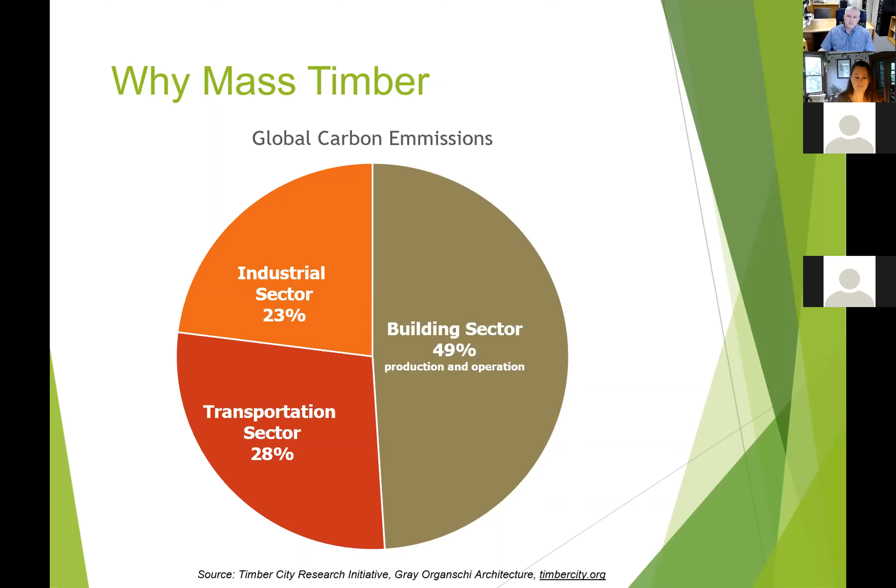So this next slide, and I apologize for the graphic, you may not be able to read it, but I wanted to share this as a way of talking about the carbon advantages of mass timber over the alternative materials, specifically concrete and steel. If you get a chance to take a closer look at it, that would be fine, and we can certainly share this presentation with you later. But what I've done is summarized the information that's in the graphic underneath the graphic.

And the net outcome of this is that a metric ton of concrete requires about a metric ton of carbon to produce. Steel is a much dirtier production process, and there is no carbon sequestration benefit to steel. So essentially, for every metric ton of steel used in construction, you're looking at 2.22 to almost 3 metric tons of carbon emission in the production process.

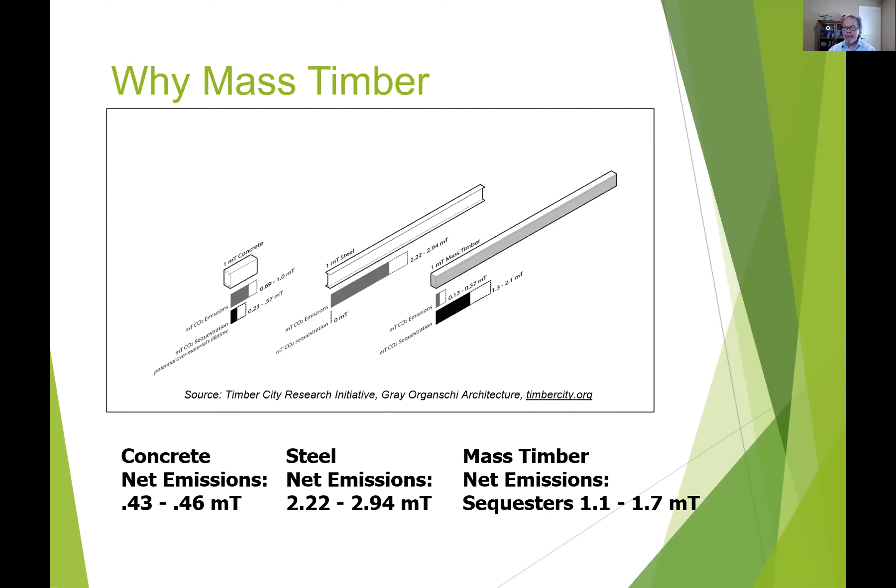Mass timber, at the end of the day, actually sequesters more carbon than is required to produce it. A metric ton of mass timber produces less than half a metric ton of carbon in the process of producing it, but it also sequesters up to 2 metric tons of carbon in the finished product. So at the end of the day, building with mass timber actually extracts carbon from the atmosphere. That is an absolutely huge game changer in the world of climate change, as you can imagine.

So just to quickly summarize what I believe are the benefits of increasing the use of mass timber over the alternative materials: one is that, at the end of the day, we can improve forest health. And that's always been a focus of Forest Business Network.

It's one of the reasons that I am so actively working with Forest Business Network, because I am passionately committed to improving forest health. Part of the outcome of improving forest health is a reduction of fire danger.

Mass timber can use a lot of fiber out of the forest that doesn't have any commercial value elsewhere. We use small diameter timber, things like that, so we can reduce the fuel load and reduce the incidence of fire, and specifically catastrophic wildfire, which has been in the news in such a big way in the last 5 or 10 years or so.

Obviously, improved forest health also protects water resources. I know in the US, about 70% of clean water comes through the forest. Therefore, better forests mean protection of those clean water resources. It also means improved wildlife habitat, which is important to an awful lot of us.

Another benefit is by increasing the use of mass timber, we improve the rural economic activity. We put more people to work in those rural communities. And as we've already talked a little bit about, the reduction of carbon emissions in the building sector is a big bonus. Finally, the sequestration of carbon, taking some of that carbon out of the atmosphere, can have a huge benefit in the climate change equation. We have the ability as an industry to have an impact on climate change moving forward by substituting mass timber for concrete and steel in the construction process.

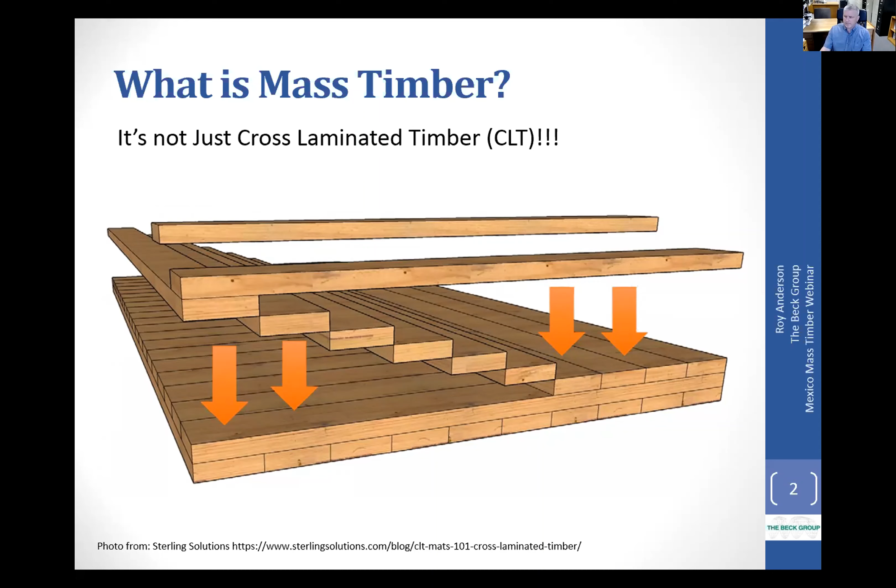This one is dowel laminated timber, or DLT. You can see the boards are oriented vertically just like NLT, but instead of nails being used to hold the pieces together, these are wooden dowels. The lumber that makes up the panel is usually about 12 to 15% moisture. These dowels are made out of hardwood, dried down to about 7% moisture. So when they're placed into the panel, they're drier than the surrounding wood, and they pick up moisture and swell, forming a really tight fit. The whole thing is held together with no adhesives, just the dowels and wood's relationship to moisture holding it all together. I think that's a pretty cool thing about that.

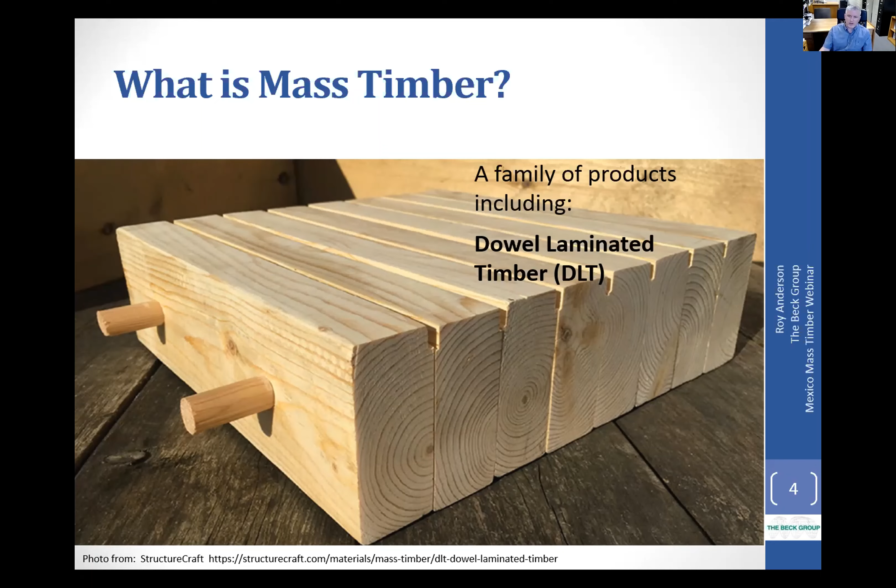Another type of mass timber is one that's been around for a long time, glue laminated timber, and that's what you see in these pictures. This one right here, I believe the dimensions are 24 inches by 24 inches. I believe those particular glulam timbers were going to be used in a building in Milwaukee, Wisconsin, that's 25 stories tall, all wood, under construction right now. These pieces were going to be used in that building, just massive pieces of wood. The picture doesn't really do it justice when you're standing right next to it, it's pretty amazing how big a piece of timber that is.

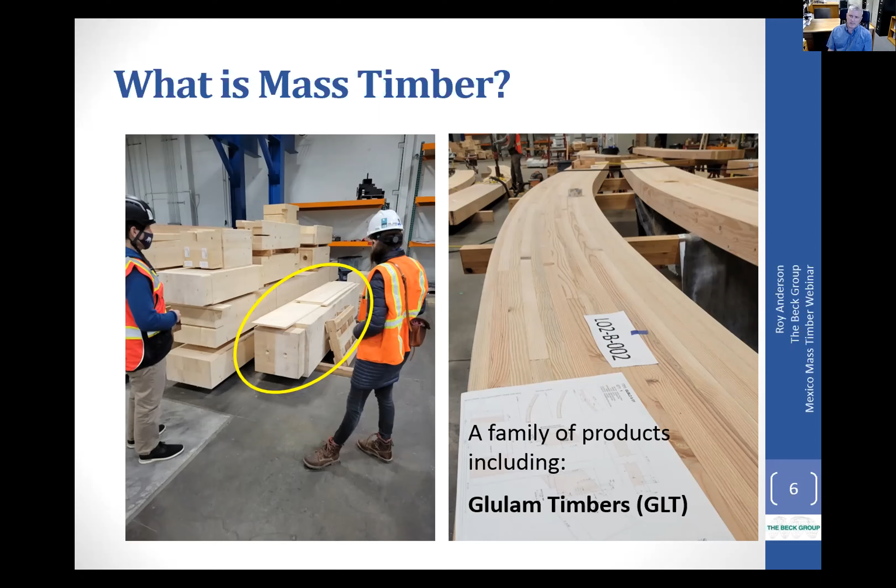So now I want to switch gears a little bit and talk about how mass timber is used. I believe this picture I have here is a mock-up, not a building that's actually been constructed, I believe, but I used it because it really shows all the different ways mass timber can be used in just one picture. You see the vertical pieces here, those are glulam timbers used as vertical supports in the building. The floors and ceilings are panels that could be CLT, mass plywood panels, could be DLT, could even be NLT, but that's typically used in a horizontal application as a floor or ceiling. In some buildings, the walls may even be made out of CLT, but that's not shown here.

I believe these would be very large GLT pieces, but they might also be just massive panels as well. But the point is, there's a variety of different ways that mass timber is used in buildings. And I think Lek and Emily are going to talk more about that.

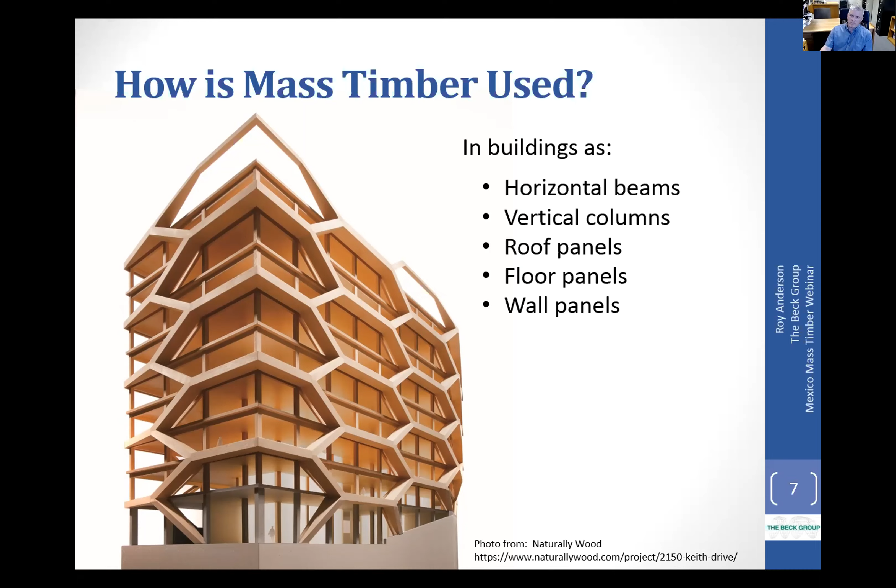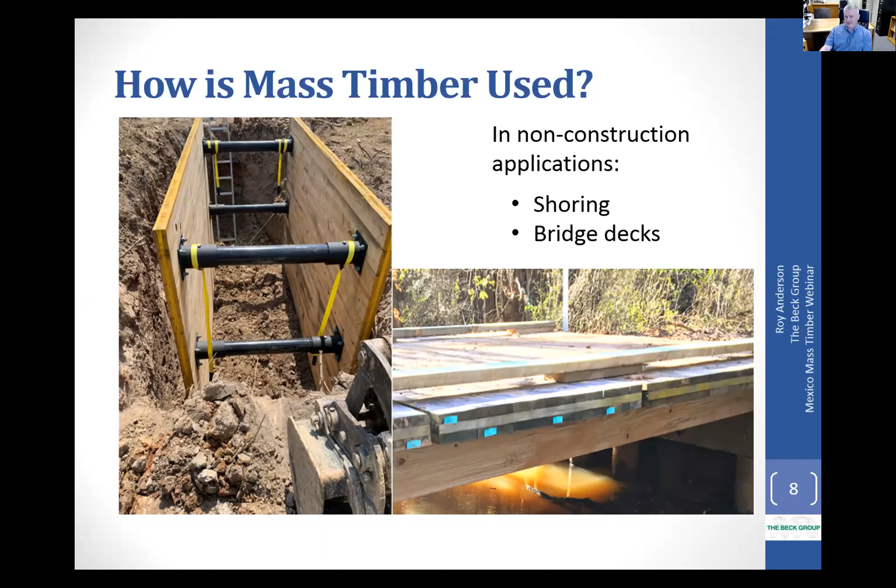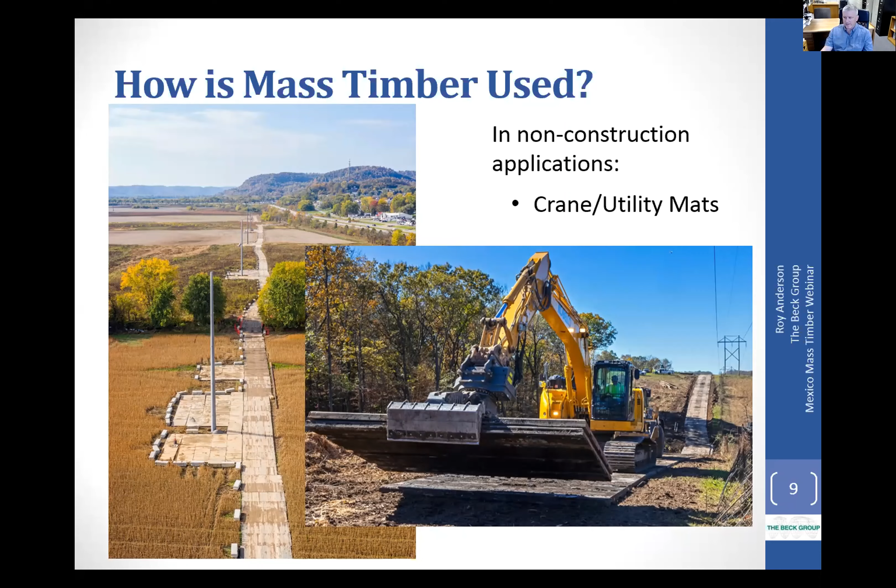So those are a lot of the ways that mass timber is used. I'm going to shift gears again now and get into some information that's contained in the report that David mentioned, which is available to all of you. I've been working on that report for 3 years, and it keeps evolving, with new information being added. I think it's a great resource, so I encourage you to download it and take a look at it.

Those things then go on to the mass timber manufacturers who make the different kinds of mass timber I just talked about. Then there are architects, designers and engineers who specify how it's going to be used in a building. Construction companies come along and build it, and finally people are living and working in mass timber buildings.

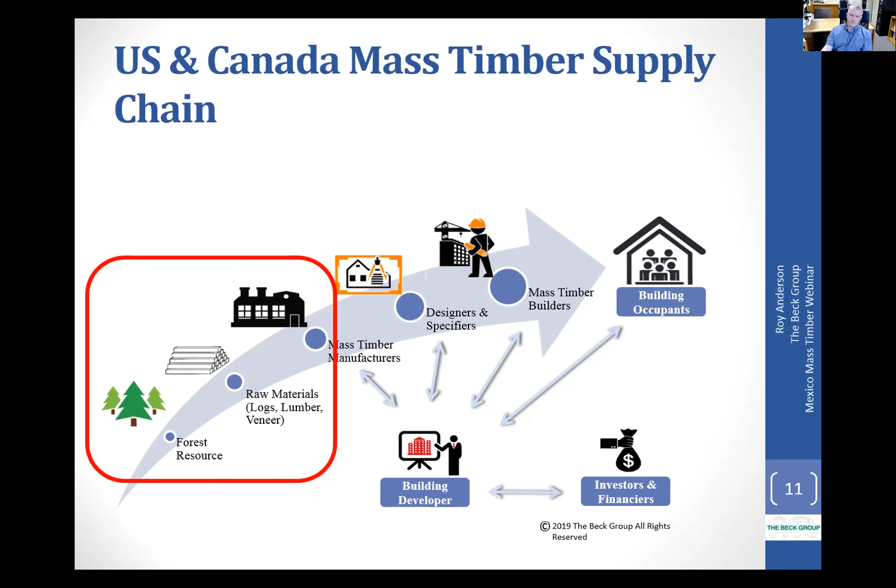I always reference this back as a way to help organize my thoughts when thinking about mass timber and how the whole industry functions. In the next few slides, I'm going to talk about these particular sectors: the forest resource, some of the raw materials that go into making mass timber, and the state of the mass timber manufacturers operating in North America right now.

Mexico has 160 million acres. So if you add it all up, it's about 1.8 billion acres of forest in North America. I don't know the details about Mexico, but it's roughly a third of the land area that's forested. And that hasn't really changed for well over 100 years - the amount of land we have as forest has been really stable for a long time. I find that's good news, and encouraging to a lot of people, because you hear so much about destruction of forests and things like that. But at least for North America, that has been stable for a long time.

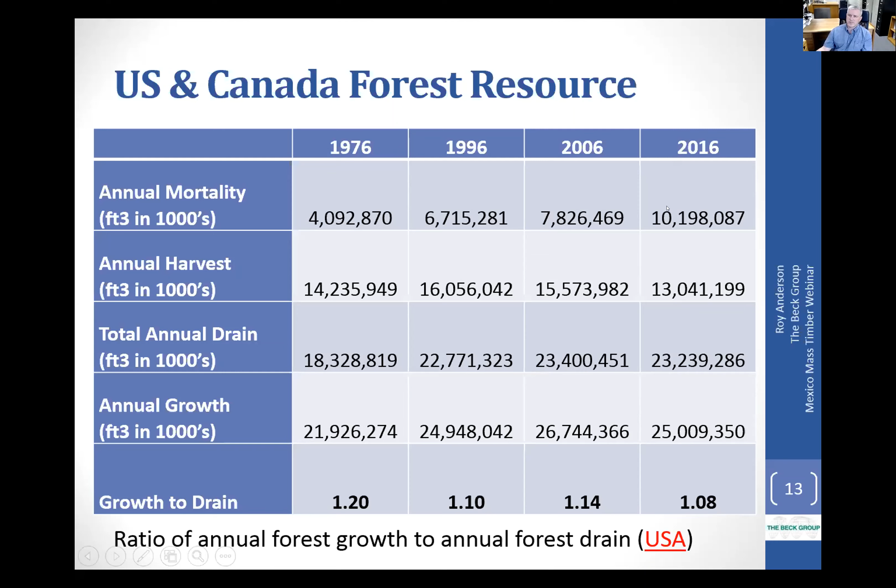One thing I'd point out here is the amount of harvest bounces around a little bit - 14 billion cubic feet in 1976, but here we are in 2016, and we actually harvested less timber in 2016 than we did in 1976. What's changing is that annual mortality is really on the increase, on the rise. I'd say that's mostly happening in Western forests in the United States, where we've had a lot of wildfire, drought, and large outbreaks of insects and disease that have affected thousands and millions of acres of forest. So the reason you see this ratio dropping isn't because we're harvesting more trees, it's more that trees are just dying naturally for a variety of different reasons.

They're actually adding more fiber each year than we are in the United States. But I would say one exception to that is in Western Canada, especially British Columbia, where they had a very large outbreak of beetle attack that killed a lot of trees, and they had to salvage as much as they could. They went into mass salvage mode, and that means now they have to pause harvesting more trees in that region to give the forest time to catch back up.

So that's just some highlights about the forest resource, but I think the key pieces of information to take away are: one, the amount of forest has been stable for years in both the United States and Canada. There's more trees growing each year than are being removed either by harvesting or natural mortality.

And then, specifically in the Western US, there's a lot of standing timber volume that's just not available because of policy issues in the way publicly owned land is being managed. So I'm talking about national forests, the Bureau of Land Management, and in some cases state-owned lands. There could be even more trees harvested and we'd still be at sustainable levels, but some of the standing timber out there just isn't available because of administrative reasons.

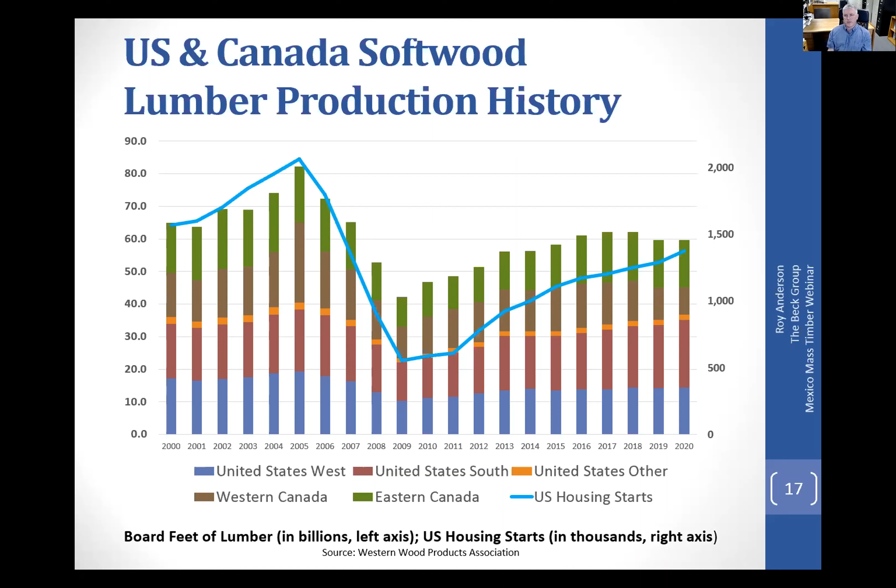But it's had a real negative impact on mass timber manufacturers, at least the ones in North America, because you didn't see the same run up in prices in Europe. That's slowly starting to happen more recently, but for a long time you didn't have that. So the mass timber manufacturers in Europe were able to get their lumber at a lower cost, and the US and Canadian mass timber manufacturers just couldn't compete with that. So you see a lot of mass timber being imported from Europe into North America over the last year and a half or two.

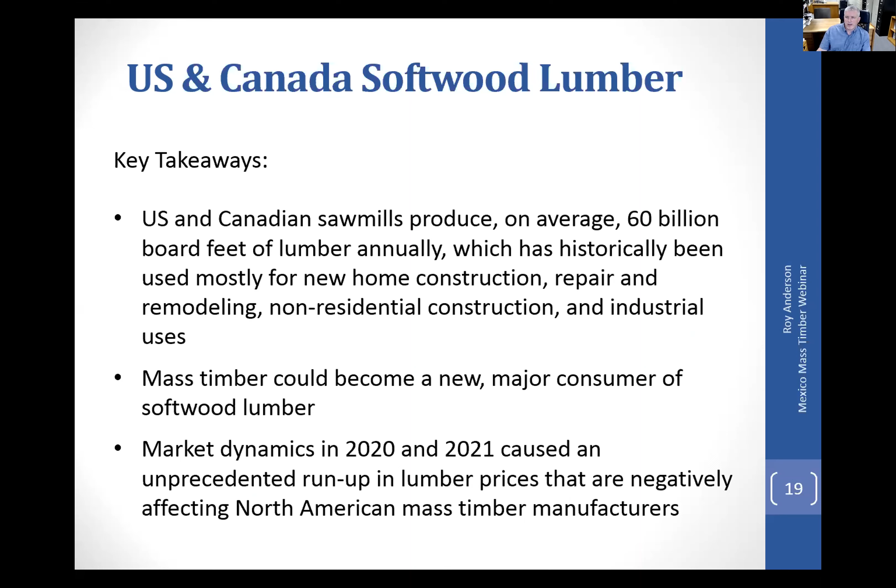That's because, like I mentioned, mass timber would be a major new consumer of softwood lumber, and I talked about the big run up in prices for lumber and how that's affected North American manufacturers. So now I've only got a couple slides left, I think three or four, but I'm going to switch gears again and talk about how mass timber is manufactured.

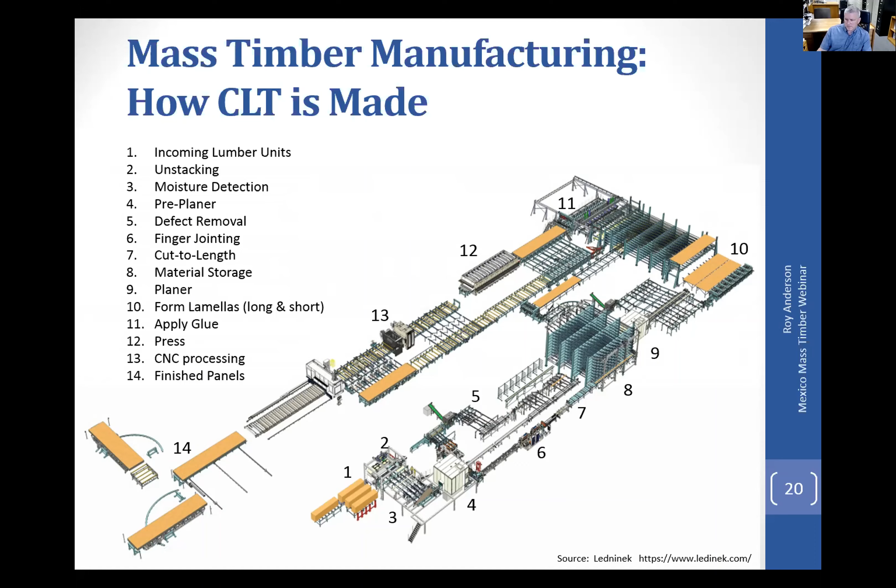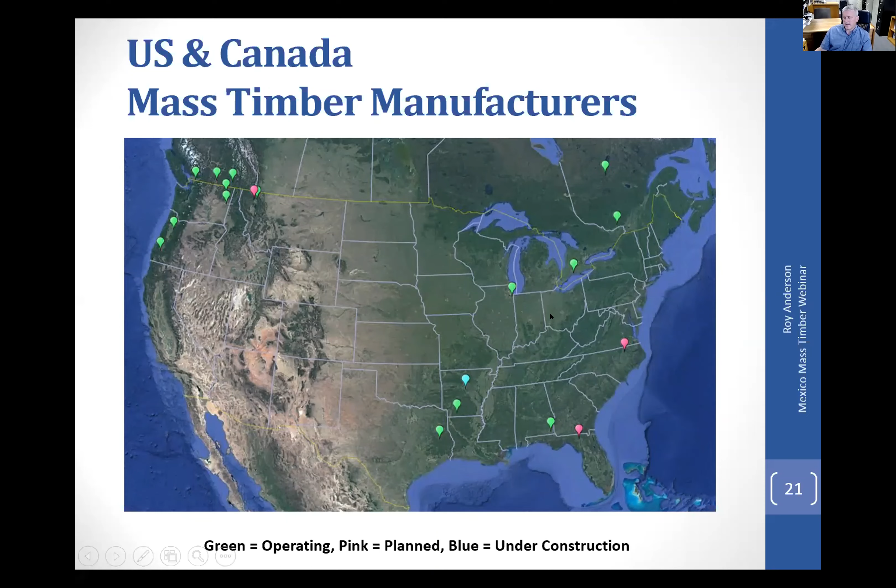If you're right in this region, you can access both types of lumber, so I think that's why you see a big cluster there. And down in the south especially, those plants, at least historically, have focused more on producing mass timber that's used in non-building applications, like matting to go along utility rights of way and things like that. So that's kind of the way things stand right now.

This one is a blue one. At the time I put this map together, this was a plant in Conway, Arkansas that was under construction, but they recently completed construction and are now starting operations.

These pink ones are plants that are under development. This one for sure is under development in Columbia Falls, Montana. And then these two I'm being kind of speculative, but Binderholz, a big company in Europe that makes mass timber, recently purchased two sawmills, one in Florida and one in North Carolina, that were in bankruptcy. Everybody thinks the reason they purchased those sawmills is because they're going to put mass timber plants adjacent to them. So it remains to be seen if mass timber plants will be built there, but I believe they will be. This lists all of the manufacturers and where they're located.

And as you can see down here at the bottom, their total capacity, and again this is based on throughput at the press, is estimated to be about 1.6 million cubic meters a year. And to give you a sense of what that means, a key metric is it takes about 22.5 board feet of lumber to make 1 cubic foot of mass timber.

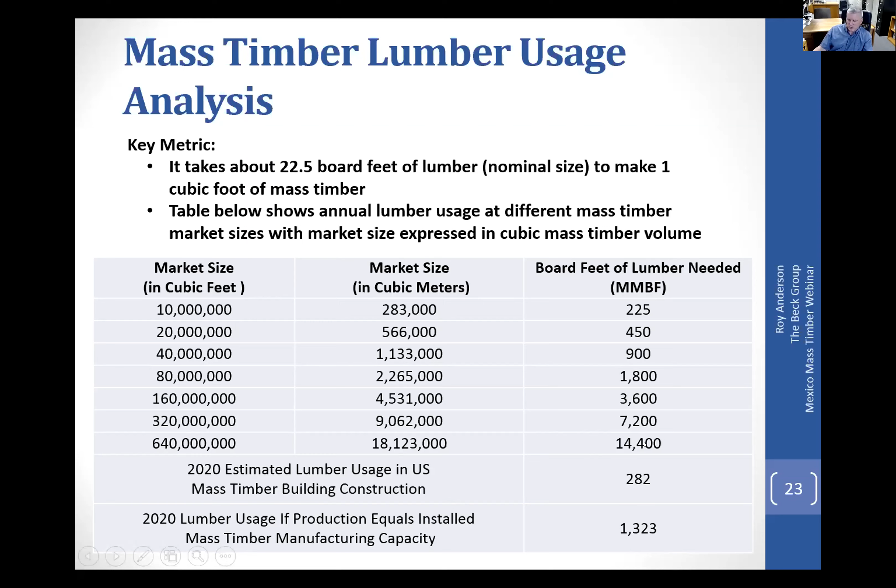But as far as I can tell, every year there's about 1 billion square feet of non-residential construction put into place in the United States. And this amount of mass timber would translate into about a little over 700 million square feet. So the point of that is, if this much mass timber was used, it would mean mass timber would be at about 70% market share.

And so I don't think—that's pretty optimistic that mass timber could take that much share of the non-residential construction market. So this amount, 14.4 billion board feet of lumber usage, to me is probably the maximum high end of what mass timber might consume as it goes forward.

So I may have gone longer than I was supposed to, but I think I'll stop right there and turn it over to Lek, and I'll stick around and answer questions if anybody has any.

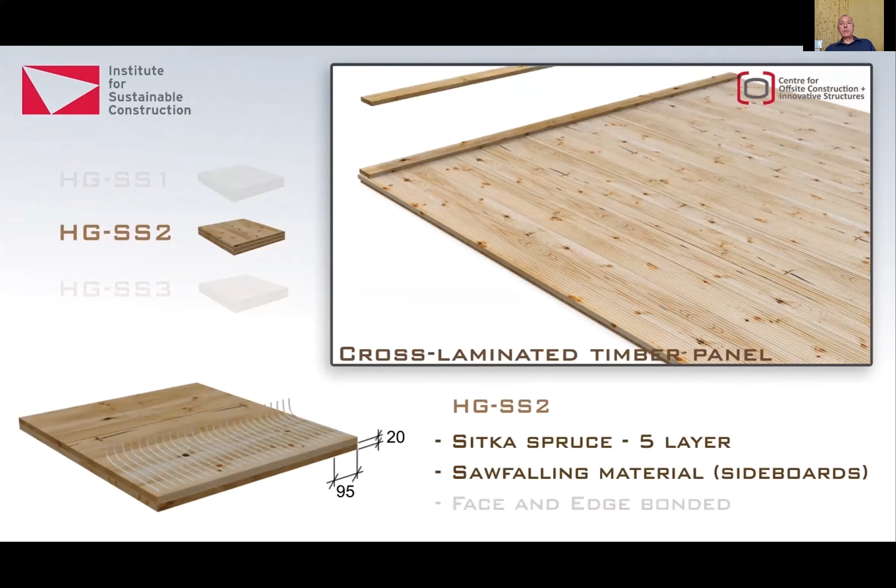At least 3 layers are required to call it a CLT. Otherwise, the product would not hold together very well. But in production there are 3, 5, 7, even 9 layers of panels, depending on the thickness needed.

Now these panels need to be prefabricated. Prefabrication means cutting out whatever necessary openings you need, ducts for utilities, as Roy mentioned. This is just one of the elements of a building. Combined together, they make the product, and the final product of the industry is actually not a panel, but a building, or the access mat that Roy mentioned.

So one consequence of this development is that what you receive is a panel of substantial size. In meters, this may be up to 4 by 20 meters in planar directions, and about 18 centimeters thick. So altogether, one panel like this may be 14 cubic meters of lumber. This is substantial cost per piece as well.

So quite often you may hear that the mass timber panel enabled prefabrication of houses. I think it's the other way around. Without prefabrication, it would not be possible to build with such massive panels. You see that prefabrication is needed because to put these panels together, you need ways of cutting, fabricating the edges, cutting the windows and door openings and ducts for utilities, which would not be possible with panels that large on the construction side.

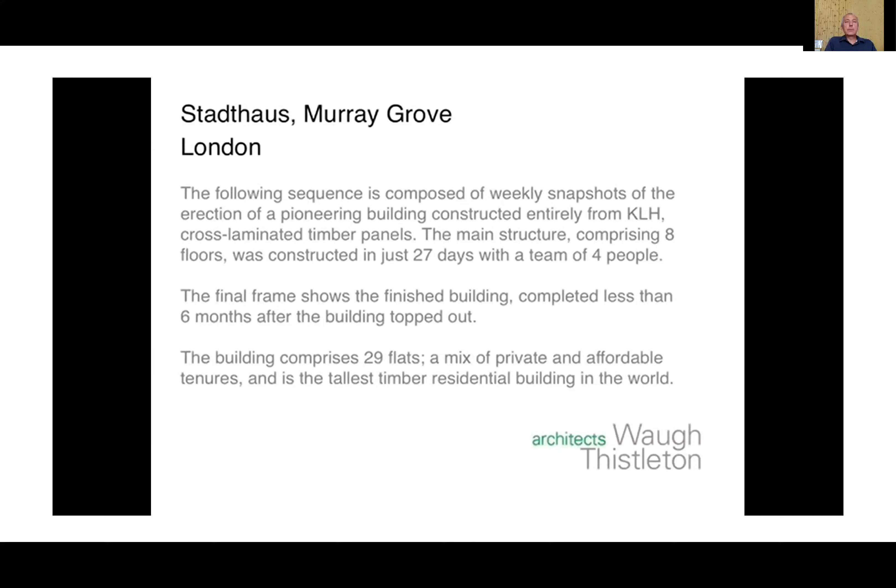The fabrication also allows building at a very rapid pace. This is one of the first tall CLT buildings, in Murray Grove in London, England. Since then, many other buildings have been built, but this one is peculiar because it's all panelized. Both walls and floors are CLT panels. They carry load and do not need any other superstructure. Here you can see its growth after the ground concrete layer has been put, and the construction goes at a pace of 1 week per story for a pretty complicated building.

Now, in other construction, like in Australia, there was a 7 or 8 story building that was completed at a pace of 4 days per story. That's pretty impressive, and this is one of the ways mass timber construction can potentially beat other construction technologies on cost. The world's largest timber building that I've checked so far, not necessarily the tallest, but by volume of mass timber panels used, is again in England, and it's called Dalston Lane.

Now, this panelized construction and prefabrication also allows shipping projects, not just panels, but entire projects, a long way from the place where they are manufactured. My best example is Australia, right here. There are a couple of companies in landlocked Austria that ship all projects fabricated, just ready to assemble, half the globe away, and it still pays the money.

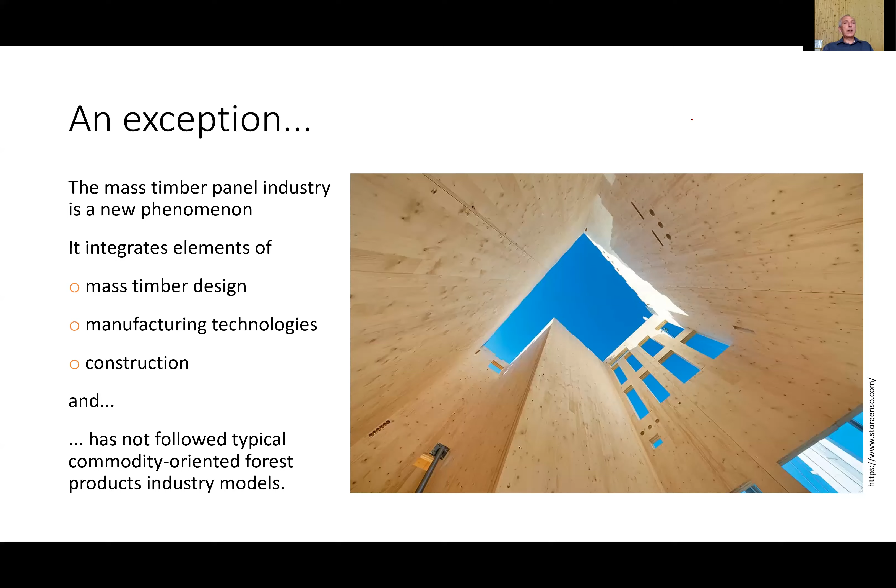So the industry did not follow typical commodity-oriented forest products industry models. I'm going to illustrate it some in here. If this would be a typical supply chain for commodity-oriented engineered products or structural products like plywood, glulam, and whatever, it all starts in harvesting, primary processing - this is what Roy was talking a lot about. You need to transport it. You have some industrial hardware, adhesives, and you produce your product. And then you don't care where it ends. You just put it for sale, and it magically disappears from the threshold of your factory.

Goes to Home Depot or to construction. So to illustrate it in a little different way, if construction is here and it's just one of the options, the manufacturer does not need to care where it goes and how it is being cut. This is all being done on site by people who fabricate the houses, right?

Now, it is very different with cross-laminated timber or with massive timber panels, where the product is essentially the entire building. So the supply chain has necessarily to involve the architect. Now, architects become like the gatekeeper to the production. They acquire projects - without them, nothing is being pressed in here. Engineers have to specify this. The CLT project management quite typically rests with the manufacturer, or if not, with a very specialized company, like this one represented by Emily, who does not produce CLT, but takes care of everything else in here, right?

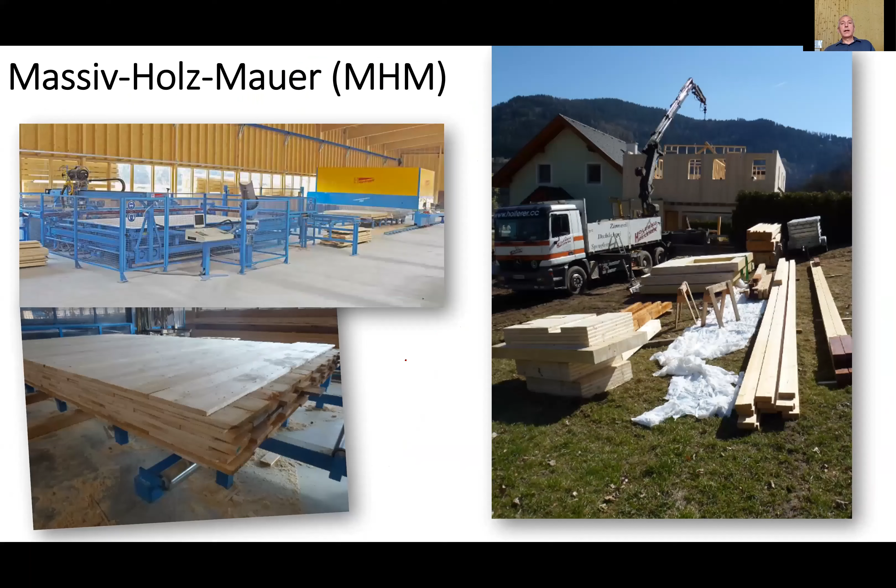Now, these statistics that I explained do not include other cross-laminated products that are not CLT. This is a nail-bonded cross-laminated timber. It's been developed in Germany, so the brand name is Massiv-Holz-Mauer, or MHM for short.

It is made in 3 simple, somewhat automated steps. First, planing the boards. Then there is a robot that lays them up and adds aluminum fluted nails to this. This penetrates just 2 layers at a time. The aluminum nails are here because then the CNC center may cut through this panel without losing teeth on steel nails. These are being used for small construction, mainly for walls and ceilings.

This product is not good for floors. Now in Switzerland, a new technology has been developed. You've heard Roy mentioning dowel laminated lumber.

This is cross-laminated lumber that is bonded with hardwood dowels. They can produce panels that are almost as strong as those made with CLT, where you bond them with adhesive. They are being produced on specialized, highly automated lines. About 8 lines like this are operating in Europe right now.

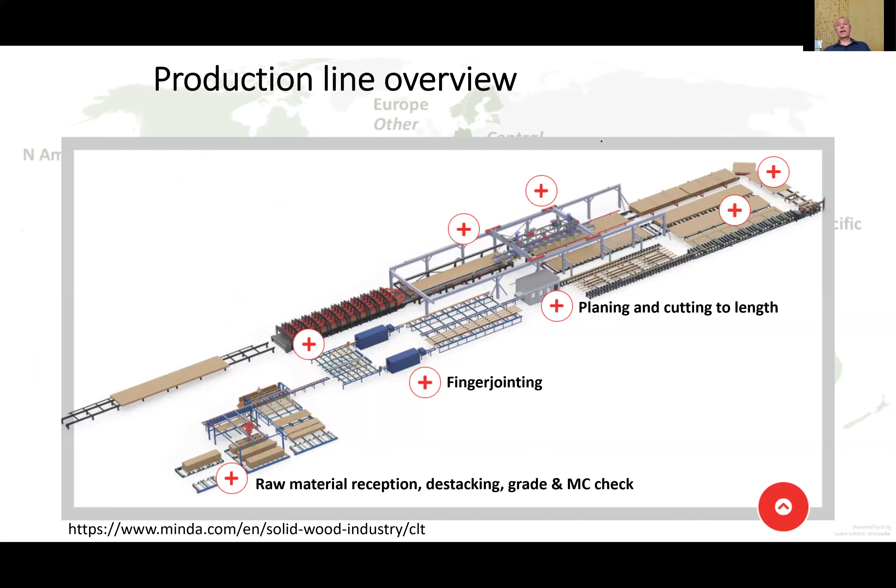Roy has already provided you with the outline of the production line. So it starts with raw material reception, finger jointing, planing to thickness, separating, cutting to long and cross pieces, lay-up, pressing, and then machining and finishing.

So I'm going to add some detail to this process. First, if we focus on raw material reception, this is where a couple of interesting things happen. Many companies, even though they trust the suppliers of lumber, want to check again the grade and moisture content, which are both very important. As for species that go into CLT, there is no magic - whatever is a commercial species in the country or region, it goes.

Now, the dominance of pine, spruce, and fir is just because Central Europe holds the majority of the production - whatever these 3 dominant commercially available species are there. In North America, meaning in the US and Canada, this is mainly spruce, pine, fir, larch, and Douglas fir.

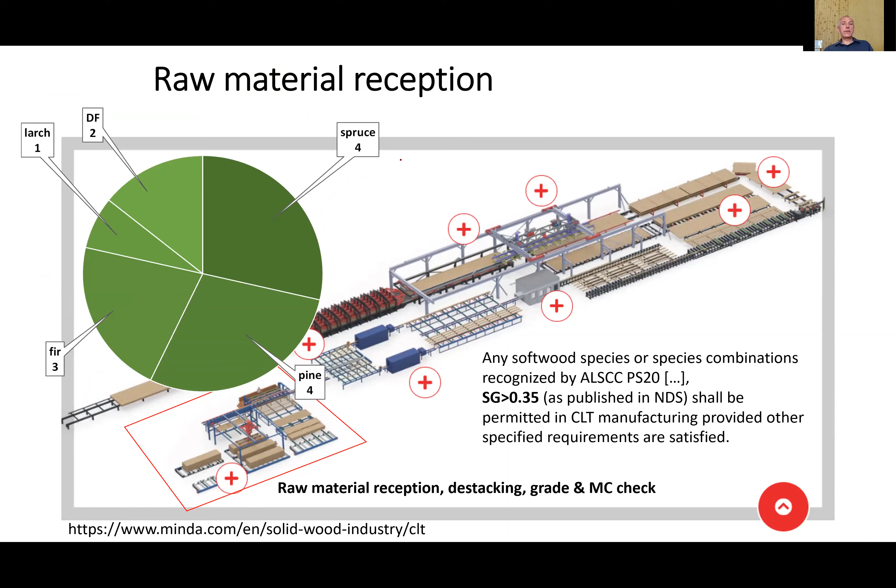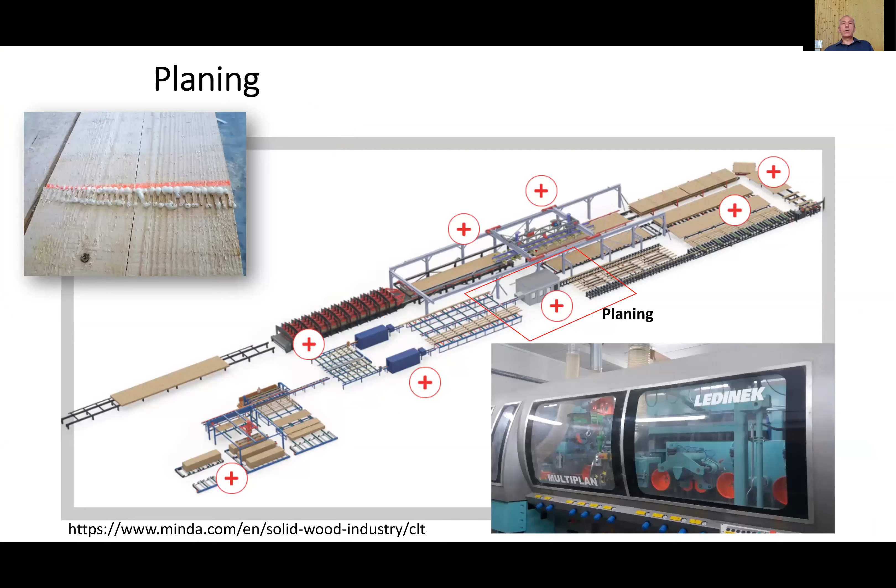The typical lumber reception area would not differ much from any typical forest products company. Finger jointing is important because these pieces come in random lengths, while you need a very specific length for your panel. The most efficient way is to bond them all together in length with this finger joint, producing a virtually unlimited long piece of lumber that you can then cut to pieces according to your needs.

The next important thing is planing. First, you want to get rid of all of these blobs that may make good bonding very difficult. But also, when you cross-laminate timber, it is very important to keep a very tight thickness tolerance.

So you would see that companies plane quite aggressively. I could only see it because they stopped - there was some problem with the planer, but with this you can see how aggressive the planing is.

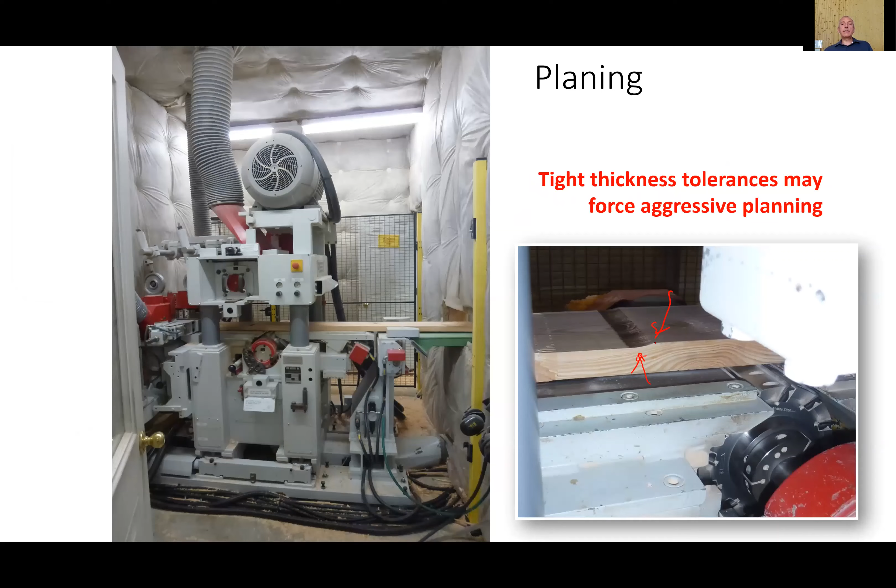After that, the long and short pieces, if they were not cut in here at this step, they are cut to length and separated. So the short pieces, the cross pieces as we call them, start to travel separately, and long pieces travel separately.

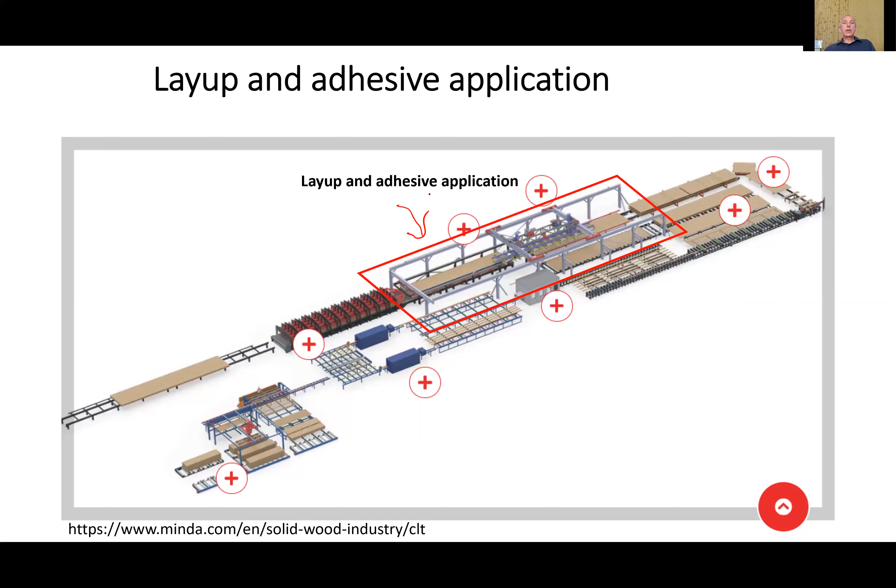And they end up at the layup and adhesive application station. This has to be combined because for each layer of lumber, you need one layer of adhesive. There are many options - there's no one way of doing this. I've seen operations where the entire layup has been done by 2 people manually, and others where it's highly automated and done by robots.

So this would be one of the highly automated processes that I'm going to show very quickly. This is a bed on which the layup is traveling into the press. It's lined with Teflon - you don't want your big pieces to stick to the bed, to the tray. And then you have vacuum conveyors.

These are the suction things that pick up the longitudinal piece. Now you see the beads of adhesive being deposited on this longitudinal piece. The same conveyor brings up the transverse layer. You see again adhesive being put in between, and here travels the next longitudinal layer. The entire panel - here you see a layup with 5 layers - travels into the press.

If you want to increase your throughput, you may go with 2 presses at the same time that alternate.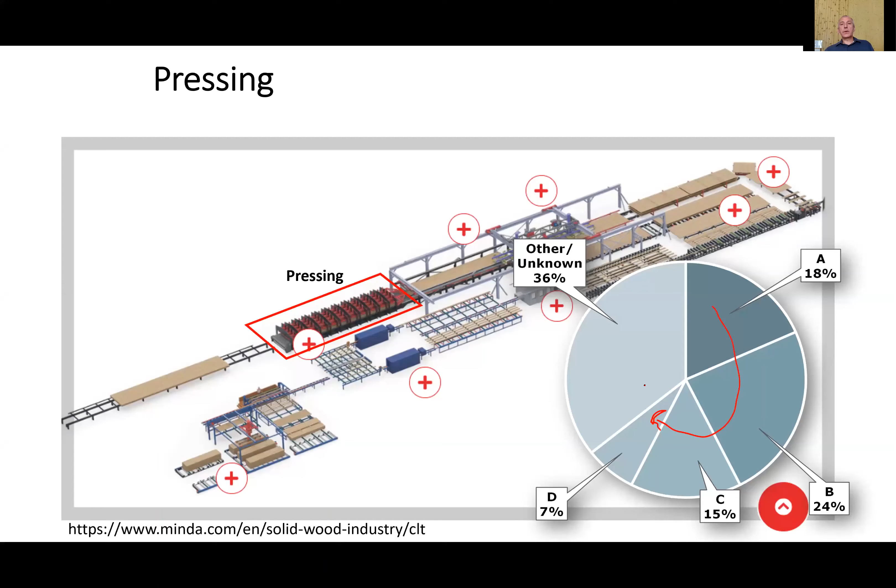Now the pressing - it used to be that the presses were fabricated or invented by each company separately. Now it is more and more typical that just 3-4 companies begin dominating the market of the hardware for CLT, and this would be Ledinek, Minda. For vacuum presses, there is one Swiss company, and Kallesoe, a company that produces radio frequency presses.

So as I said, they used to come in all sizes and flavors. These are examples of custom-made presses. But a quite often overlooked option is quite inexpensive vacuum pressing.

In vacuum pressing, you see the presses look like a wading pool and have a silicone blanket to cover the layup. And then when the vacuum is pulled, you actually press, you squeeze the panels together. That way you can put many dissimilar pieces into this vacuum press at the same time, which is an advantage.

It is much harder though to automate the layup, unless you are like this smart German company that has vacuum beds specially designed in a way that they can be stacked upon each other, and they have an automatic layup that is adjusted to this.

Now, the next step is the CNC finishing. This would be like cutting the windows, doors, and machining the edges and so on.

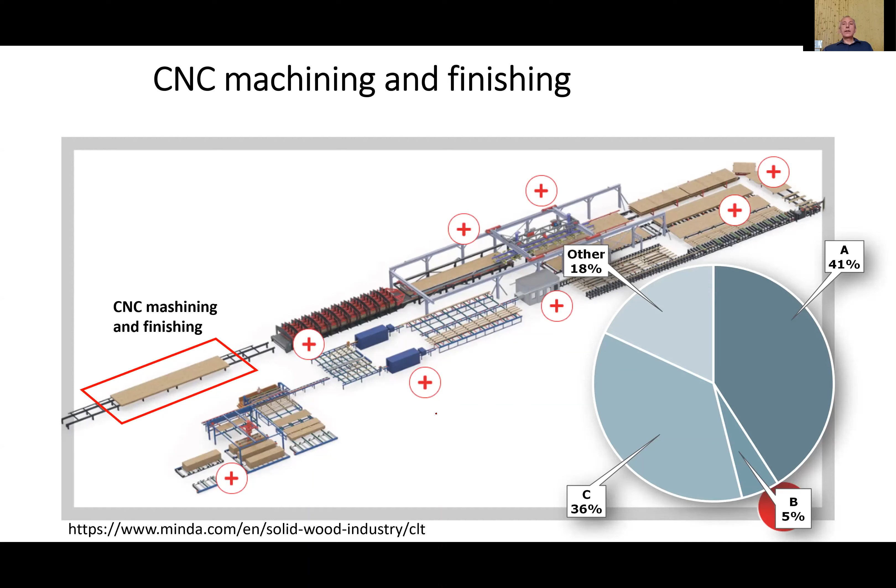Again, this tends to be dominated by just 2 major manufacturers of the CNC machines, and this would be Hundegger and Uniteam, which used to be - I think they changed the name - they merged with another company, Biesse, an Italian brand. And then there is a smaller German or Swiss manufacturer, Weinmann.

So now the important thing is, again, at the end of the pressing process, you have a very heavy panel. In order to move it towards this machining, you need to somehow install some kind of connectors that will allow you to transport the panel within your manufacturing line. This would be the CNC machine seen from outside.

Again, this is another example of transporting a much larger panel. So this would be an example of this Uniteam gantry. Inside, it has robots, essentially, with all kinds of wood cutting tools. Here you would see something that resembles a chainsaw to cut the window and door openings accurately.

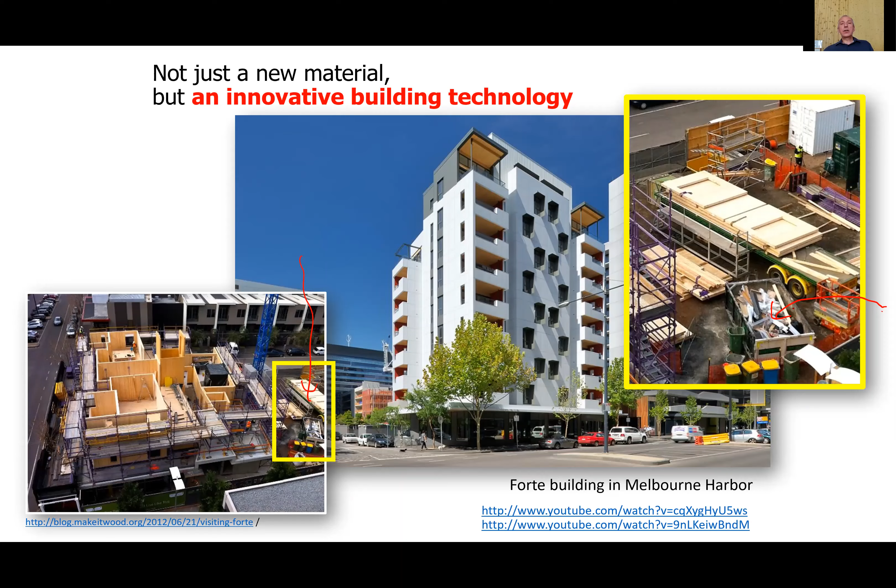The construction is very quiet and fast. This is why it's actually the manufacturer's responsibility to take care of how these things are being prepared for transportation. Here you see a complex project. All of this represents one project, but it's divided into daily deliveries, and all of this needs to be timed. It's a very logistically complex procedure.

So if we dare to have a little summary in flight, there is incredible diversity in the manufacturing process and market strategies of the companies. They vary in their capacities from as little as 500 cubic meters a year to as much as 100,000 cubic meters a year, and bigger still lines are coming up.

Owners vary from family enterprises to big international holdings, for which the manufacturing of CLT is just one of the many things that they do. The manufacturing processes and level of automation vary greatly.

However, these new lines tend to be high capacity and highly automated, with the option for a company that produces the hardware to deliver the entire turnkey integrated line to the investor. About 75% of all presses installed are made by one of three specialized, or four, I should make it four, specialized manufacturers of the hardware.

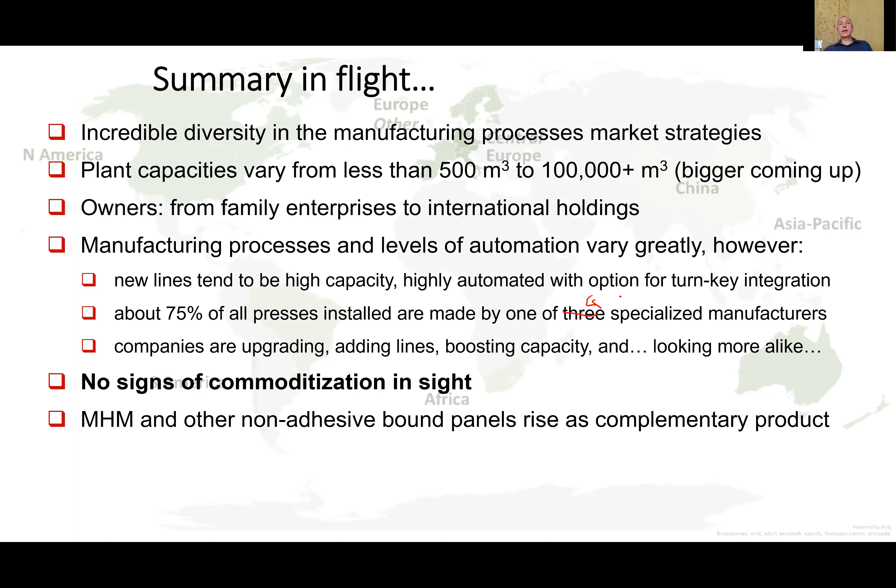MHM and dowel-bonded cross laminated timber are rising as complementary products. They do not really compete with CLT. They are complementary, and they see big growth.

20 years since the invention of CLT, this industry is still very young. It's still looking for its way. So Mexico is not too late to join by all means, and who knows, some new ideas may come out from this development. And I would stop, and we may talk more about it during questions.

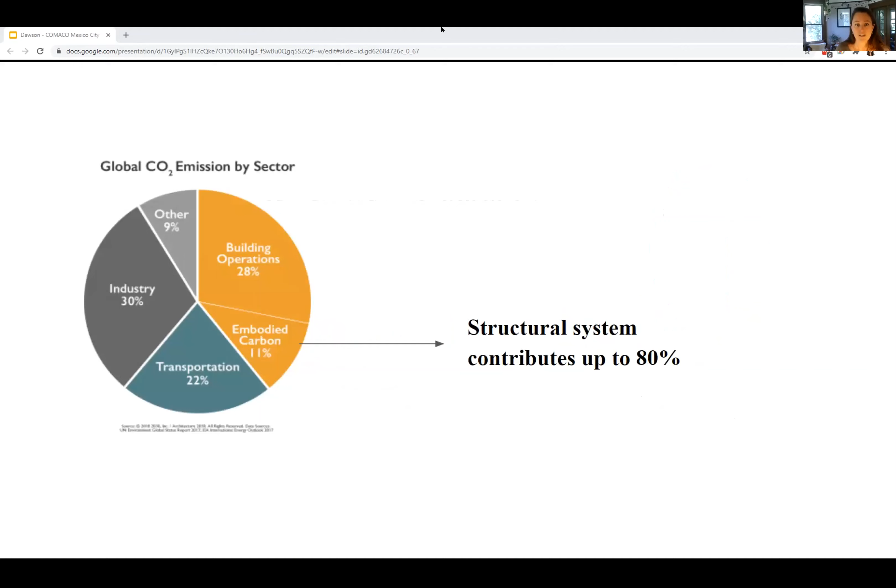When we look at the building industry, this is a slightly different chart than Dave showed earlier, simply because of how concrete and steel are separated out here. What I like about this is it shows what the embodied carbon piece of that pie is for the building industry—11% of all total carbon emissions are what it takes to simply build the building before it even opens, and 80% of that 11% is in the structure. So when we replace traditional high embodied carbon materials like concrete and steel with something bio-based, we're taking a significant portion of that embodied energy and solving for it. Globally, cement and steel together produce about 10% of global carbon emissions across different sectors, but it's really impactful to reduce our dependency on those materials in buildings.

When we talk about timber, we talk about forests, which is this wonderful connection we all have as human beings to the forests. If you're living on the west coast of North America, this has gotten clearer and clearer—our relationship to the forest is very critical, and the management of our forests is something we're all thinking about, whether you're in the building industry, the forestry industry, or not.

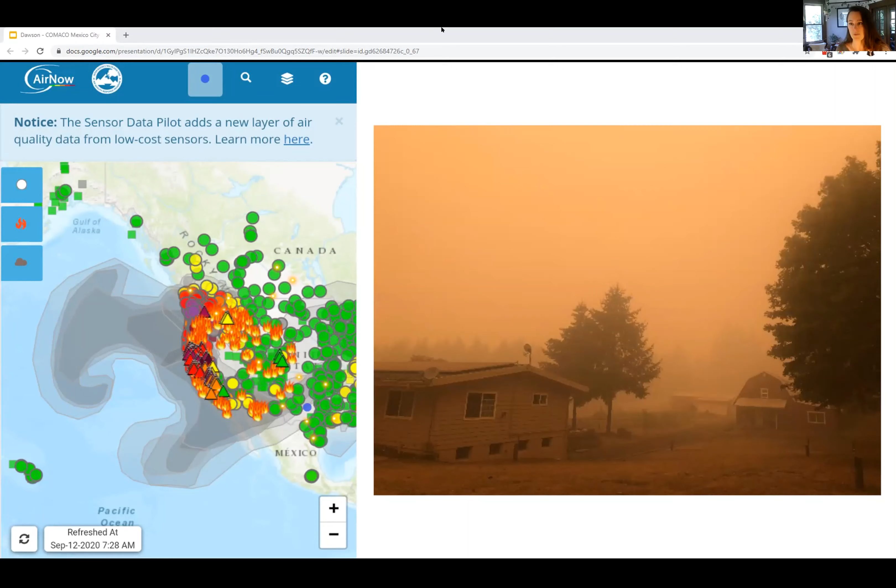So we have this wonderful opportunity, because of the place we're in in history, to look at our forest practices and do something about it. Mass timber, of course, sees that opportunity as well, potentially using salvage material efficiently.

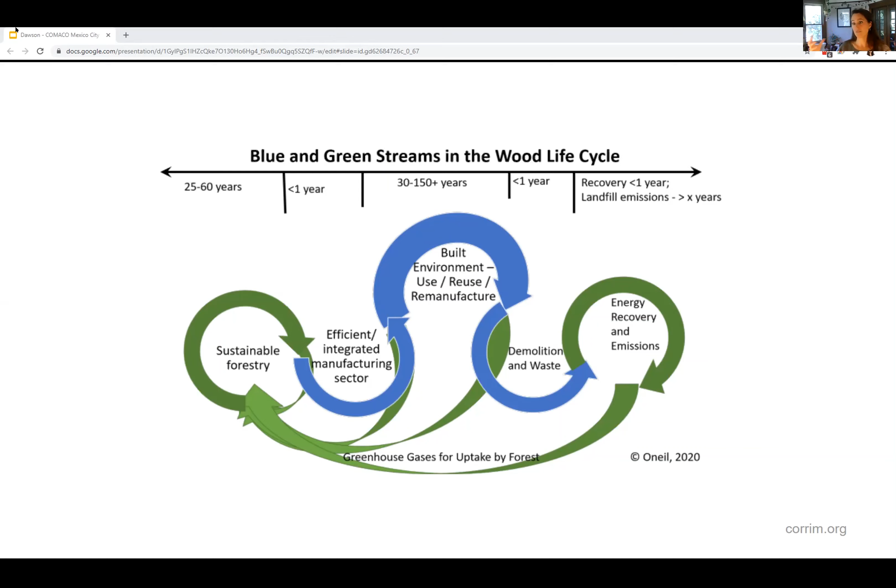One of the reasons why this mass timber especially fits into that concept is because of the reuse potential for it. Because it's made out of these massive pieces, very, very valuable, as Lech pointed out, these are very, very valuable pieces of wood. They're easier to disassemble and reuse potentially. So keeping that wood out of the landfill and making sure that it doesn't decompose and go back into the atmosphere is part of that idea of a circular economy.

So we're starting to think as designers more about a design for reuse or a design for disassembly outcome at the end of the life of the building. But hopefully these buildings stand for at least 100 years or more because they're so beautiful and they're so durable as well. So when we think about designing a low carbon building or a carbon sequestering building, there's a long list of things.

It's not just about the structure, but when we look at using products like cross-laminated timber, it starts to check a lot of these boxes. And that's because of the sequestration, but it's also because of the overall efficiency of the process that you start to see driven by the modularity and the precision of these elements.

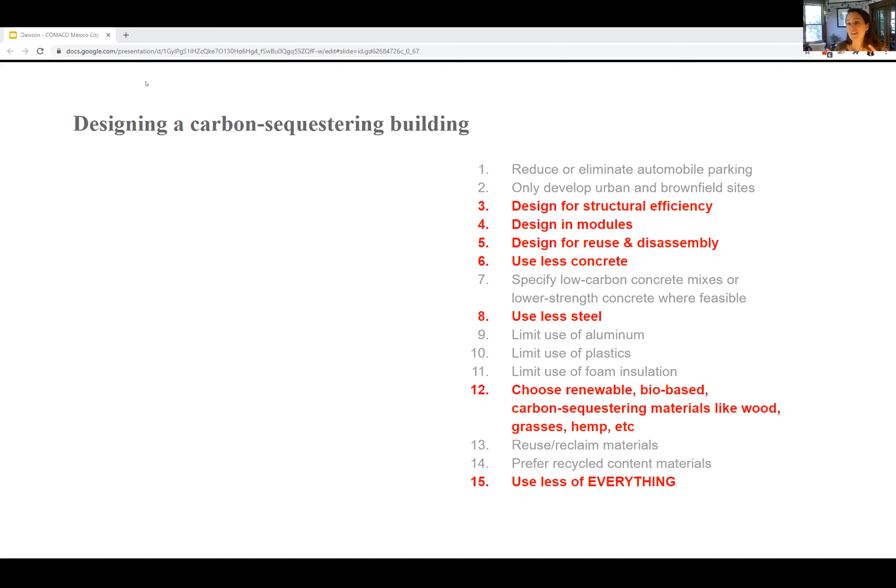There's fewer waste, less waste. And when you're designing in modules, that reduction in waste tends to ripple out into other materials as well. We're able to use less concrete, able to use less steel, and really we're able to use just less of everything. When you can use the structural material as a finished surface, you are necessarily reducing the amount of furring or gypsum board or paint in the building and reducing your overall footprint.

You'll have this resource by the end of this presentation. And I usually talk about this because this is such a great opportunity.

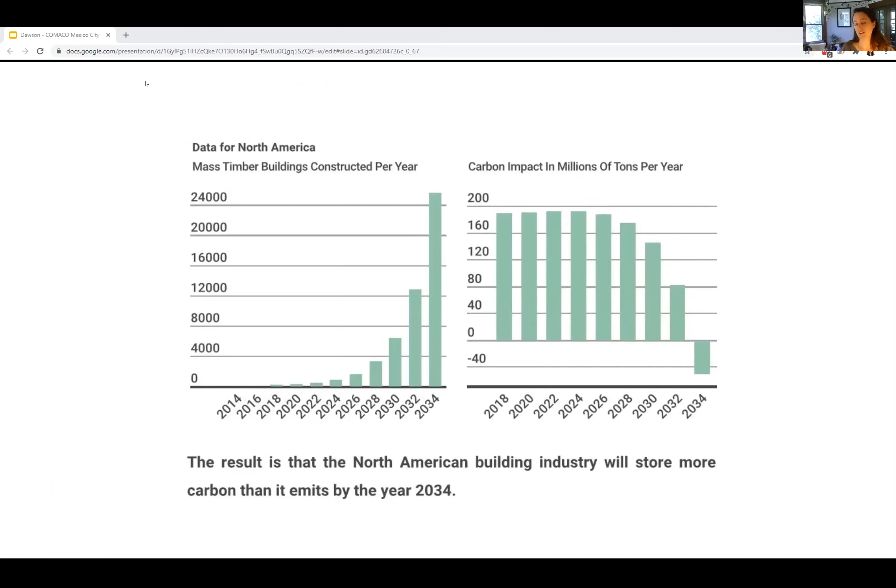I love working with Roy and with Lek because we're able to look at the entire supply chain together. And so we can ask big questions about capacity and the market. I think Roy went over this really well, so I'm not gonna spend too much time on this, but there's just a lot of potential for complete market saturation in the building market because of the capacity of North American forests. And there's bottlenecks around labor and machinery and all of that, but there's a lot to do to get there, but the potential is there, which is really, really exciting.

And we're seeing that growth. And I think Lek had a great diagram on this too about the production, and global production is really showing that exponential interest in CLT and mass timber as a building product.

So getting into some of our projects, the Radiator is our first mass timber building. We completed this building in 2014. It was actually a pretty old-fashioned approach with glulam post and beam structure with tongue and groove decking. So this is the kind of building that you'd see built a lot about 100 years ago in industrial circumstances. But this, along with the two other buildings in the development, was the largest mass timber development in about a century in Oregon, if not a larger scope than that.

And we had so much success leasing this building. We were able to secure tenants, key anchor tenants for this building before we even broke ground. And that was because we took them to the Bullitt Center up in Seattle, which is another mass timber building that was built, that had just been completed.

They saw the effects of the wood in the space and thought about their tenants. This is a health clinic, and they thought about the people coming to find wellness in this space, understanding that the health and productivity benefits of being in an exposed wood environment were so valuable to them. So we leased up the entire building 6 months faster than our pro forma assumed, and we only had one tenant turnover before the pandemic happened. There was a bit more turnover after that, but not more than you'd expect given the economy being strange.

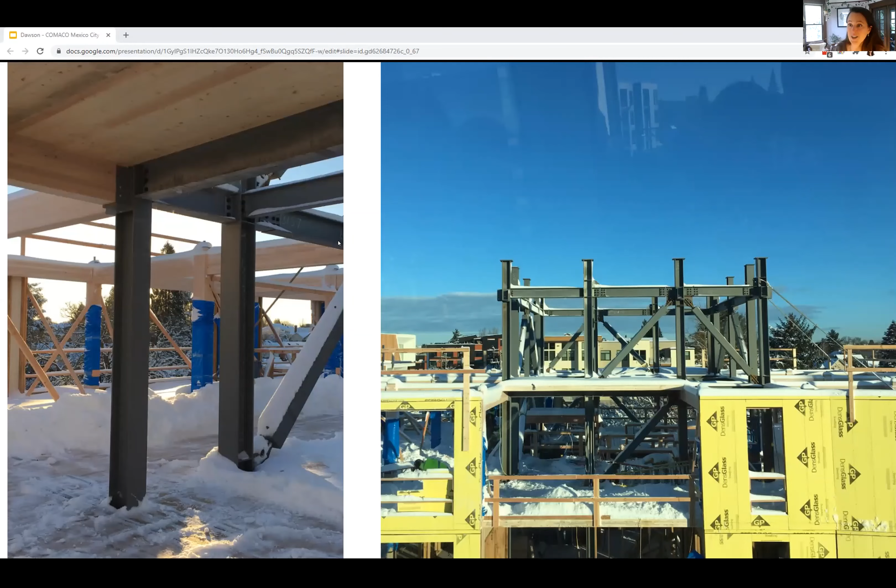One other thing that we really learned when we were building Carbon 12 was that mass timber can be put up in pretty much any weather. You're not going to see a lot of snow down in Mexico, maybe at higher elevations sometimes, but we had the snowiest winter in Portland that Portland had seen in a long time, the winter we were putting up this building.

If it were concrete, we would have had to halt construction for weeks because of this cold snap. As it was, because there's no temperature requirements to install cross-laminated timber, we only lost one day, and that was because people weren't able to drive to the site due to road conditions. We estimated that we saved over 3 months of construction time overall, considering the potential delays, than if we had gone with a concrete building. That was an estimate from our concrete subcontractor.

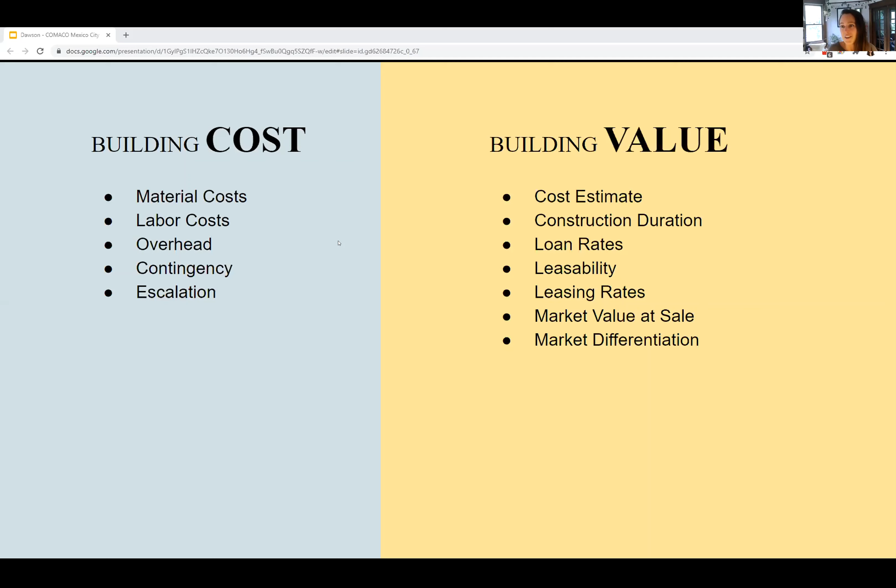The pandemics and forest fires weren't something we foresaw, but that affected our last construction project. We're also thinking about loan rates and when we can start paying back those loans. We're thinking about leasability and leasing rates - at what rates can we start to sell or lease these spaces? And what is the market value at sale, and how long do we want to take to sell this building? Market differentiation is a really important part of thinking about a lot of those components.

So I'm going to take you through a little cost exercise that we did on the Canyons, a building that we completed last November. It's a 70-unit apartment building. This is a market rate apartment building, so we were able to take the price point way down from the luxury product down to a market rate product. This is a 6-story building. It is a very straightforward, from a code standpoint, type 3A building over a type 1A podium.

So we do have a concrete foundation, basement, and first floor podium, and otherwise it's very straightforward. We have CLT floors and roof, and light framing for our shear walls and non-load bearing framing in between. We also have an unusual corridor situation - it's a double loaded corridor floor plan, but instead of a typical corridor, we have a 5-story atrium space where we're really featuring those CLT panels, and the idea is to compound that biophilic effect of seeing wood and feeling wood, while also bringing in light and air.

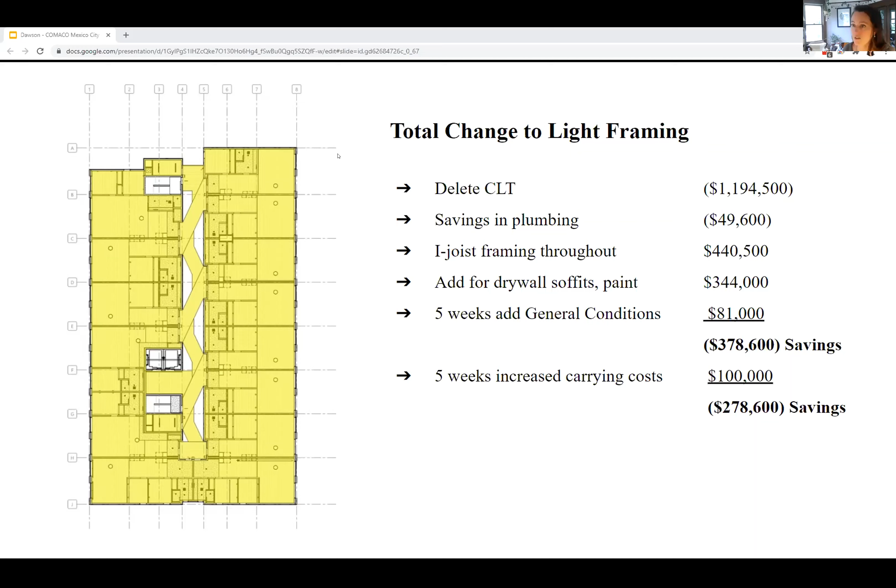But then we went to our CFO, who is familiar with the carrying costs we were incurring on our loans and other fees we were paying as a developer. The increased 5 weeks would have cost us $100,000, which immediately takes a bite out of that savings. So then we're looking at a $278,000 savings.

So now we need to look at what that means from a leasability and differentiation standpoint. What is the value we're losing in this building if we go completely to a soffited situation—no more wood ceilings, all gypsum board and paint? Our lease rates go down a little bit, which means our monthly returns go down as well, and our annual returns start to go down pretty significantly—almost $100,000 a year.

If you translate that into a payback period for a premium building, you're looking at really only a 3-year payback on a premium asset, which makes it a lot easier to sell and easier to lease. The value at sale impact at year 0, which goes up every year as the building matures, is $1.7 million. So it's really important to look at the value holistically when you start to make decisions as a design team, contracting team, and build team about whether it's really worth it to take those value losses.

I did a square footage estimate on this too—if you back out and ask how much per square foot you're really paying for that premium wood ceiling and higher ceiling, since we would have lost some ceiling depth as well, it ended up being about the installed cost of carpet. So for a really low material cost premium, we're getting a very high value building out of it.

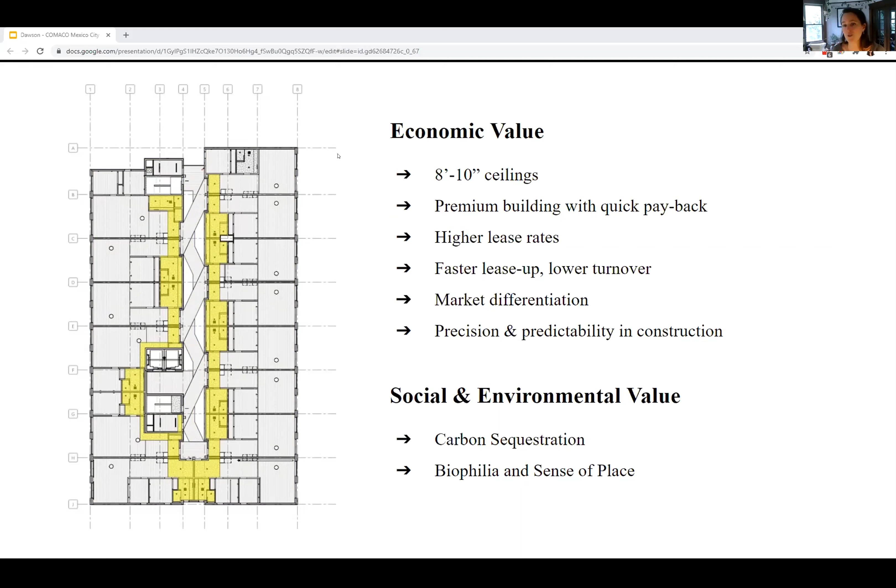So we chose to keep the CLT in the project, and we chose to keep that reduced soffited area, for all the reasons I just said, but also because that biophilia is that value. We're starting to be able to put numbers to that as we get more data on leasing rates and sell rates on our buildings.

A couple of pictures from the construction process—our team found again that this process was just really smooth. You can see Carbon 12 in the background here; this building is just right next door. So if you're ever in Portland, it's an easy tour to go through on one block, and our office is actually just a block over there too—so we have a little mass timber campus on the corner of Williams and Fremont in Portland.

A couple of pictures of the completed units—you can see just how special those spaces are, and imagine with those almost 9-foot ceilings just how expansive and warm those spaces feel. I have a video of our concrete podium being poured, which is the same footprint as the upper part of the building.

On the left, you'll watch our concrete going in, all of the formwork required, and then on the right-hand side, you'll see our framed walls starting to get stood up to support the 4th floor of CLT going in. We're calling this a race because it's the same footprint.

How fast can you build with concrete? How fast can you build with wood? The formwork is starting to get finished up on the concrete side. You can see how many people are working on that as well. There's just dozens of people scrambling around on the site. Over on the right-hand side, you have a much smaller crew, and they are almost done with the floor. They have completed the CLT installation.

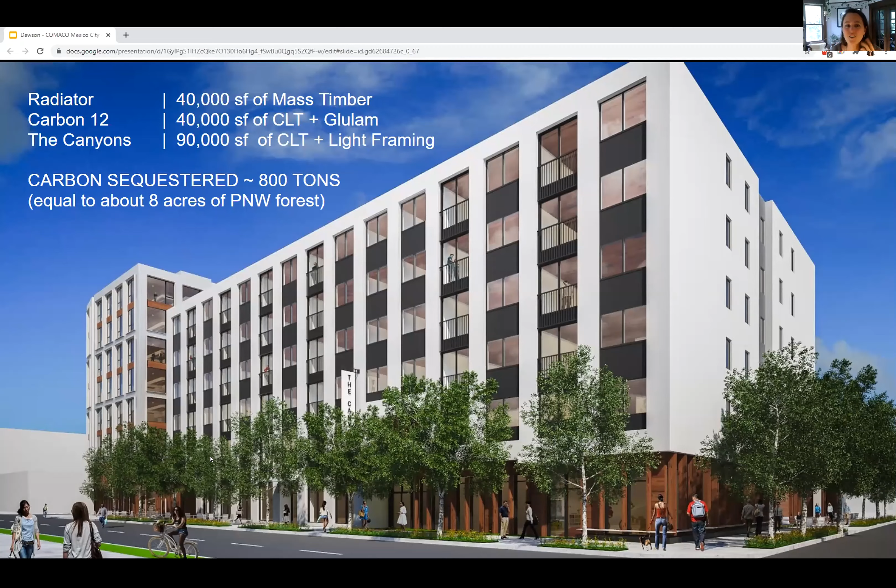So I like to think about it in terms of the forest that I'm familiar with. All forests are going to have a little bit different profile, but the Pacific Northwest forest is very carbon rich. So it's equal to about 8 acres of living forest in the Pacific Northwest. But when we think about a forest, it's only part of the forest that we're extracting to produce dimensional lumber and to produce mass timber. The trees itself are sequestering a lot of carbon, but there's a lot of other things in the forest that are sequestering carbon as well, mostly the soil.

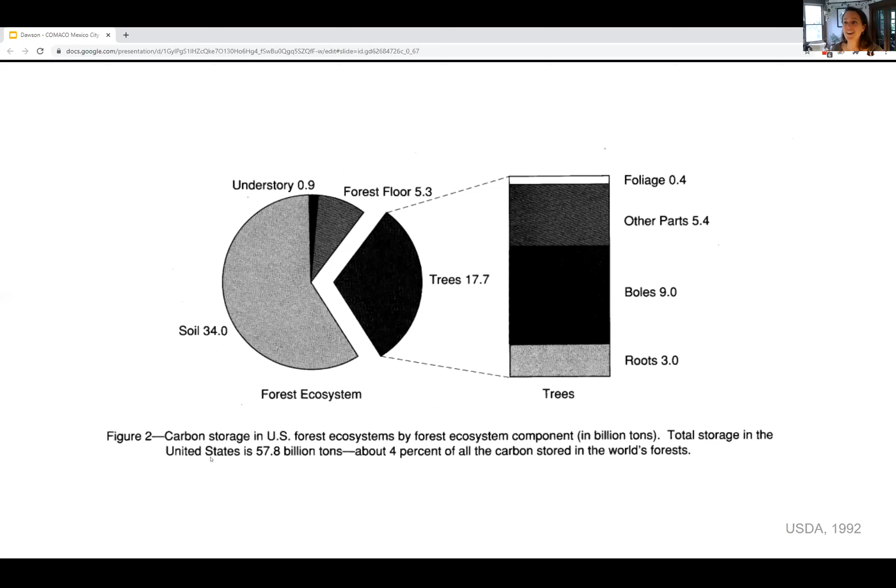I wanted to show this too because this is in the United States. The development of the codes has just been fascinating, rather unprecedented in an architect's life. To have a completely new construction type in the code is very exciting. So our type 4 heavy timber now has 4 different subtypes in it, which allows buildings to go up to 18 stories. The 3 different types are different levels of fire resistance. And in this case, built into the code is encapsulation of that timber with non-combustible materials.

What that means is that the higher you go, if you go above 9 stories to 12 stories, you're encapsulating about 30% of that exposed wood. If you go up to 18 stories, you're actually encapsulating 100% of that exposed wood if you go with a prescriptive path. So if you think back to the value exercise that we just went through, that really starts to break down the value proposition of a mass timber building if you completely cover it up with non-combustible materials. So what I think is going to happen is we're going to see more innovative

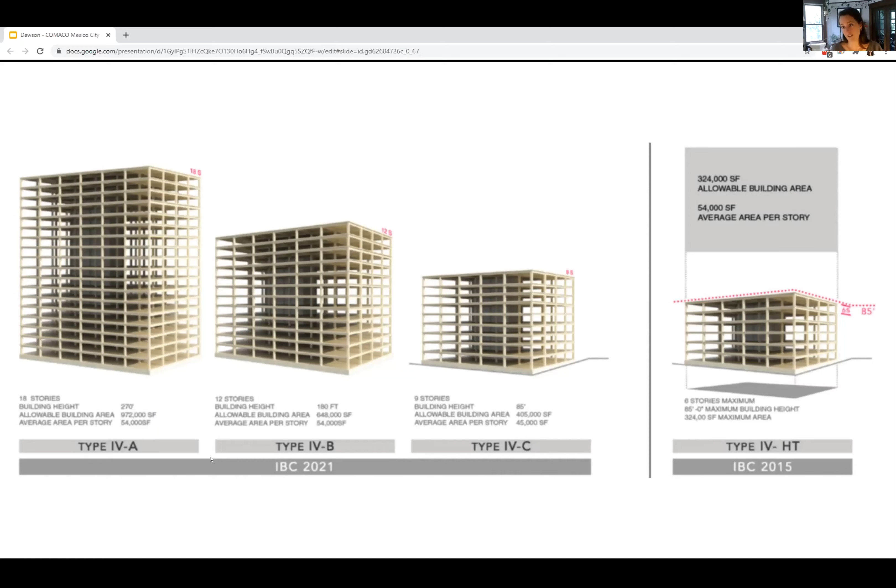performance-based buildings, which can look at the combustibility of timber and model flame spread and smoke spread, and show jurisdictions through a performance report, in jurisdictions that support that approach, that mass timber buildings are safe at taller heights without that encapsulation requirement. So I see that as a really promising next round of research for our industry.

And what we're going to be working on in the meantime is the price point and getting to affordability. We were able to do a luxury product. We were able to do a market rate product. Now, how do we do something that can help solve our housing crisis and our affordability crisis in the building industry? Right now we are funded by the U.S. Forest Service to ask these questions and try to come up with some solutions.